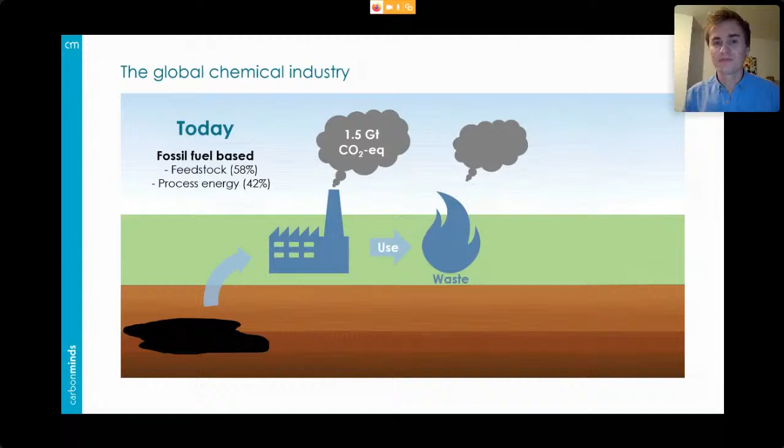What we see here, and what the industry is about today, is basically a flow from fossil resources in the ground, through production, through use, through disposal, right into the atmosphere. There's an almost linear flow of carbon atoms from the ground into the atmosphere, and this is a huge problem we're facing. This is what causes the climate problem.

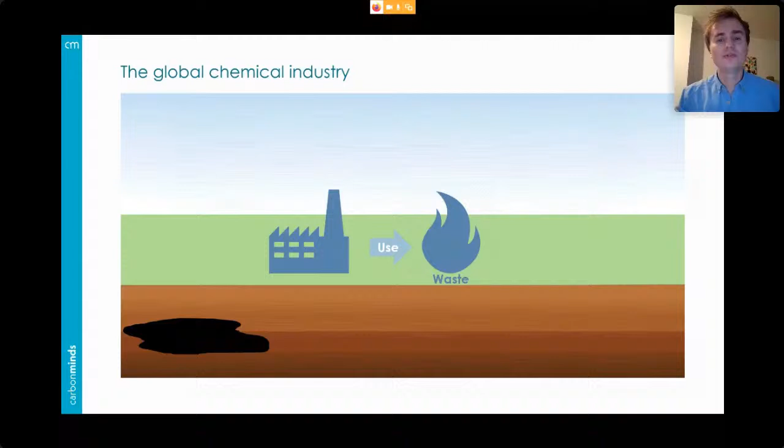So let's think about how we can change this situation. The idea is we need to avoid this flow of fossil resources from the ground, and we can do this by creating more circular carbon flows. One option here is carbon capture and utilization, or CCU.

In carbon capture and utilization, we capture CO2 from emission sources. This could be a power plant, a waste incineration plant, or even directly from air. We use the CO2 as a carbon feedstock for the chemicals we are producing, basically recycling it and putting it back into the production chain.

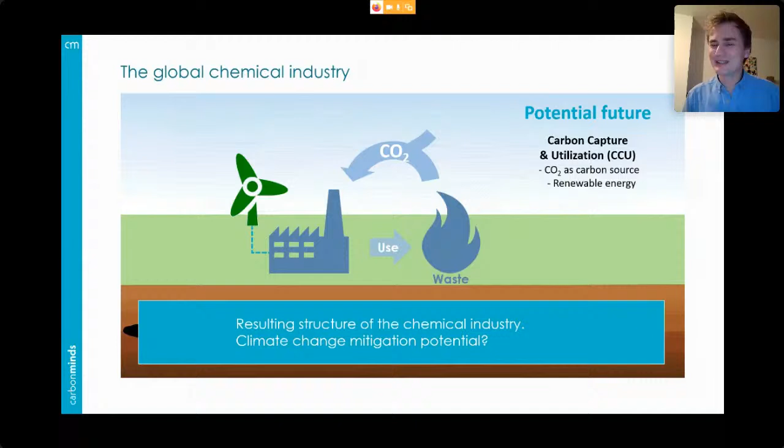We can do this using renewable energy. CO2 is very low in energy, so to build products out of it we need energy, which could come from another high energy reactant, often hydrogen, produced using renewable energy. So the question is, what is the climate change mitigation potential of this CCU concept? To understand this, we need to address another question first: how would the chemical industry look if it were entirely based on carbon capture and utilization?

So if we want to understand changes in the chemical industry, we can't look into different chemicals or different plants one by one. We need to capture this complexity of the industry. We need a detailed model of the chemical industry to understand potential changes. In this work, we built such a detailed model of this part of the chemical industry, for the production of so-called large volume chemicals, the biggest chemicals in the chemical industry.

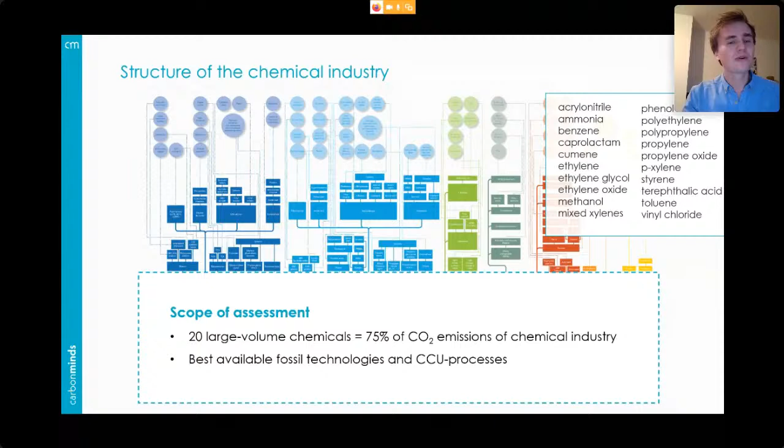We do this in this study by looking into the best available fossil-based technologies and comparing them to alternative options based on carbon capture and utilization. So how can we do that? Well, when we started to build this model, the first thing was we had to understand how these supply chains worked. So we looked into the supply chain.

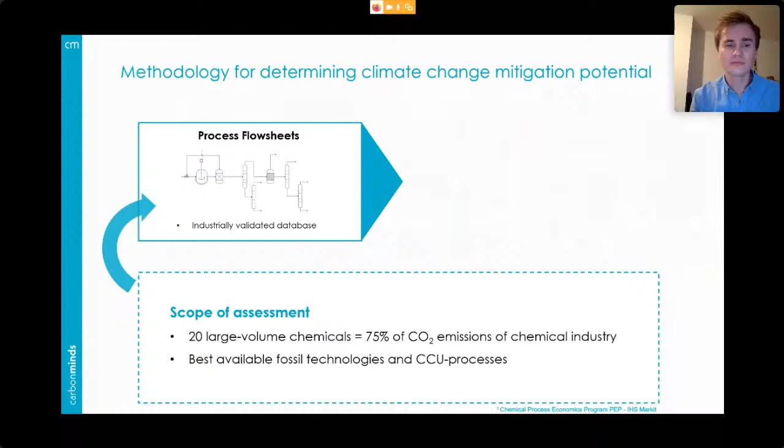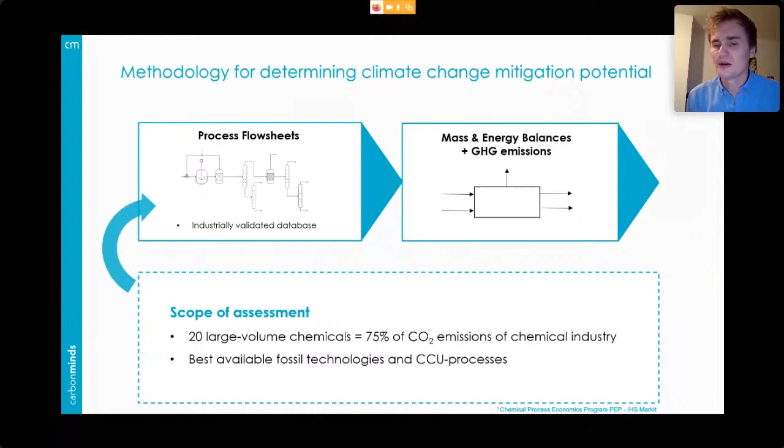For every single production step, we developed very detailed process flow sheets, like the one that you see on this slide, based on an industrially validated database. We used these flow sheets in order to extract mass balances, energy balances, and the direct greenhouse gas emissions of each process. Based on this information, we could build what is called a bottom-up model, a detailed model of this part of the chemical industry, consisting of more than 160 processes.

This model now allows us to track the flows of energy and material throughout the entire production chain of the chemical industry, from the resources to the products that we're looking at. So it's basically a digital representation of how chemicals are produced today.

And once we have this type of model, we can now, let's say, play with it. We did it by transforming it into an optimization model, which can minimize the greenhouse gas emissions of the production of these 20 chemicals for the final demand in 2030. The constraint here is that we will produce enough chemicals to satisfy the expected demand for 2030.

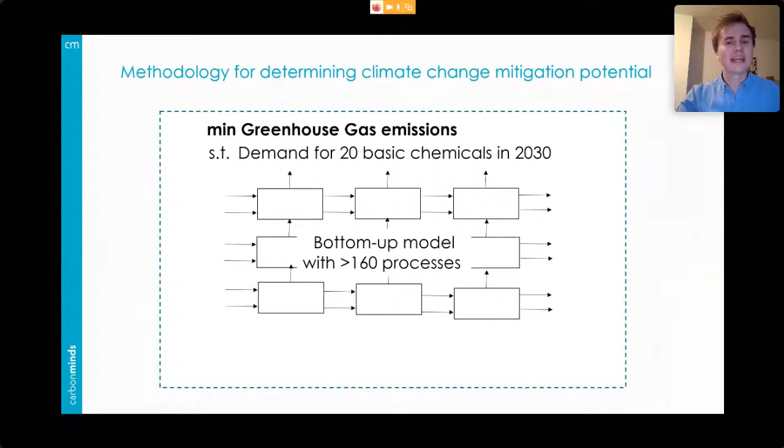Based on this model, we now compare 3 different scenarios. The first scenario is our baseline, what we call the business as usual scenario, or the conventional scenario, where chemicals are produced like they are produced right now. So let me show you how this works.

First of all, we input the final demand of all the chemicals into the model. These are just groups, types of chemicals—those are the 20 chemicals that you see here. Then we allow the model to use only the feedstocks that are used in the industry today, and then we can run this optimization model.

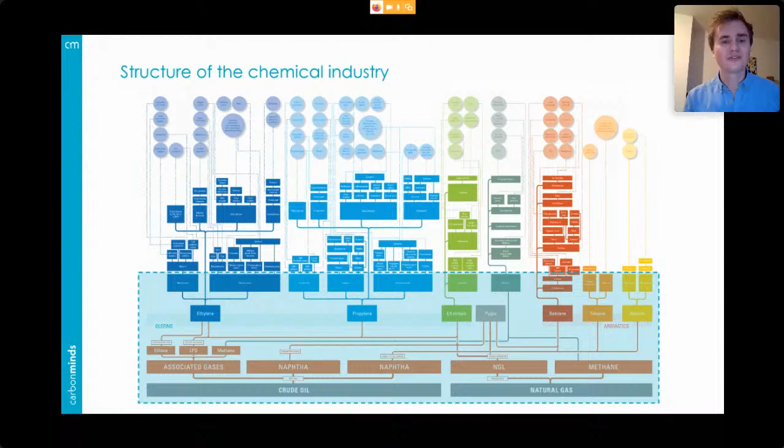We also calculated the emissions, which is in line with other emission expectations for 2030. So this was basically the validation of our model. It seems to work.

And now that the model works, we can go a step further and allow the optimization model to choose not only fossil resources, but also CO2 as a carbon feedstock, the captured CO2 from CO2 utilization, and we allow the model to use hydrogen from water electrolysis, hydrogen generated based on electricity.

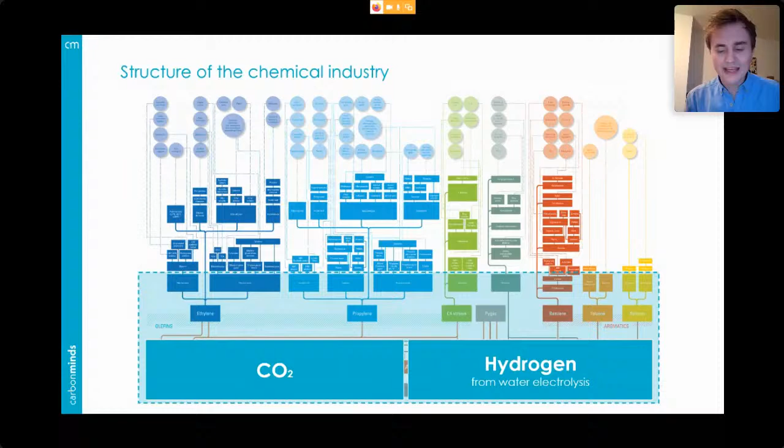We do exactly the same. We built two scenarios. A first scenario, which we call the high TRL scenario. TRL stands for technology readiness level, and high TRLs stand for technologies which are developed already very far, which are very close to the market or already in the market.

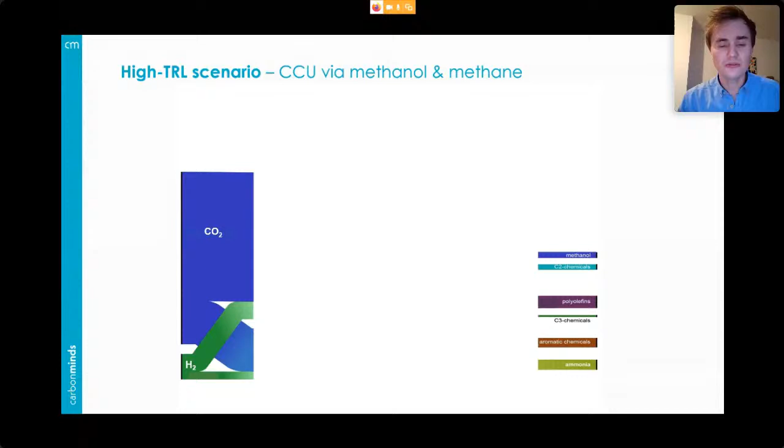We input the same final demand as in the previous slide, but now we allow the model to use CO2 and hydrogen as a carbon feedstock. We implement these high TRL CCU technologies, which is the production of methanol, a huge platform chemical, from CO2 and hydrogen, and methane.

Then we run the model again and get an entirely new superstructure for the chemical industry. What you see here is how the chemical industry would look like if it were entirely based on CO2 and hydrogen. Here, CO2 and hydrogen are transformed into methanol and methane. We use so-called methanol-to-olefin and methanol-to-aromatics processes to end up with ethylene and propylene, which are again the basis for the other chemicals.

There are two things that are very interesting in this slide. The first one is, as you might have seen, I've changed the scaling of the slide. This is because we have a very large co-production of water, so otherwise it just wouldn't have fit on the screen. The production of methanol and methane, and also the methanol-to-olefin processes, co-produce a lot of water. We can recycle this for hydrogen production, but this means our plants must become much bigger, which will increase investment costs.

But there's also good news in this: the part of the chemical industry that you see back here is the same structure that you saw on the previous slide. It's the same plants, how we start with ethylene, propylene, and aromatics and end up with the final products. So here, not much investment would be needed. This is one scenario for how CCU could be implemented.

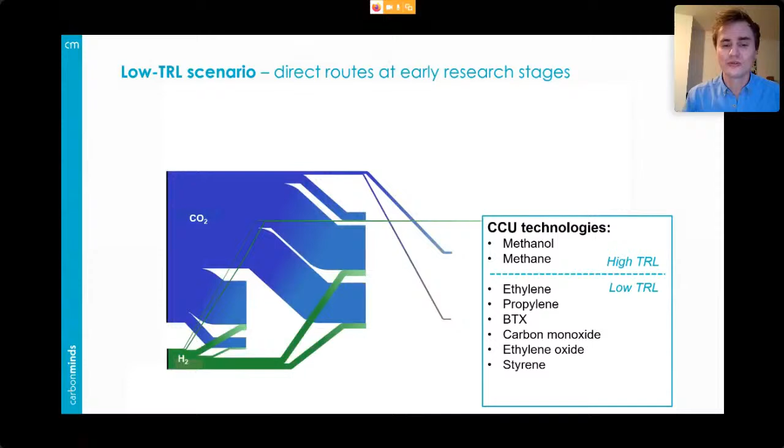We do the same: we start with CO2 and hydrogen. We can run the model and again end up with a completely new structure for the chemical industry. And here the good news is a little less water is co-produced, which is an indicator of higher efficiency.

But at the same time, this part on the right side is a completely new superstructure, which already hints that there would be quite a lot of new investment involved in achieving this scenario. But again, this is a structure for how the chemical industry, or a renewable chemical industry based on CO2 and hydrogen, could look like. And this is basically also the answer to the first question: what would the structure of the chemical industry look like?

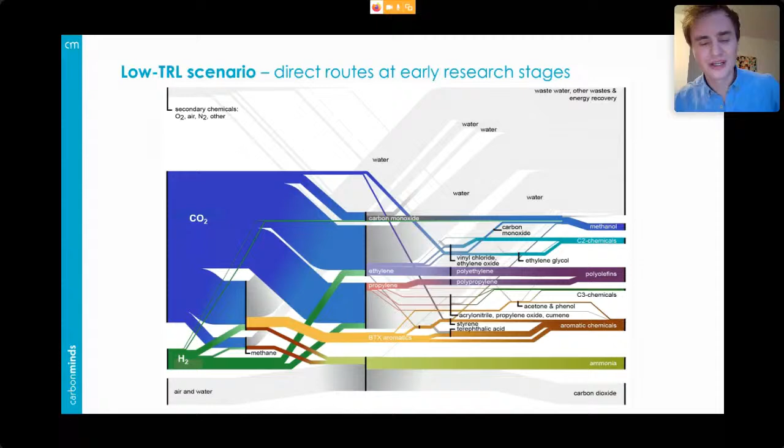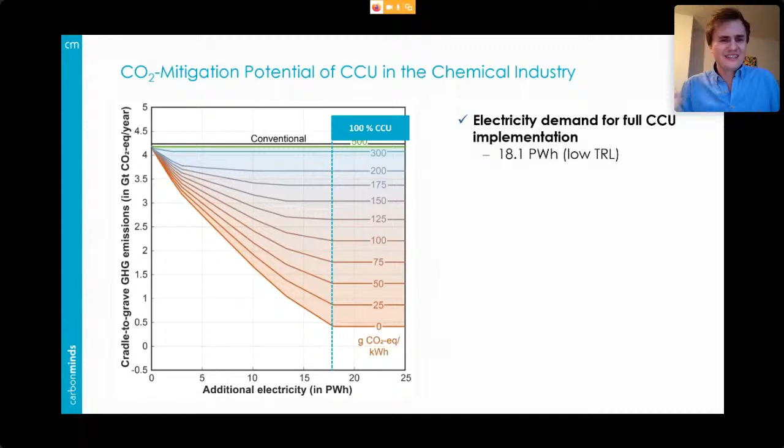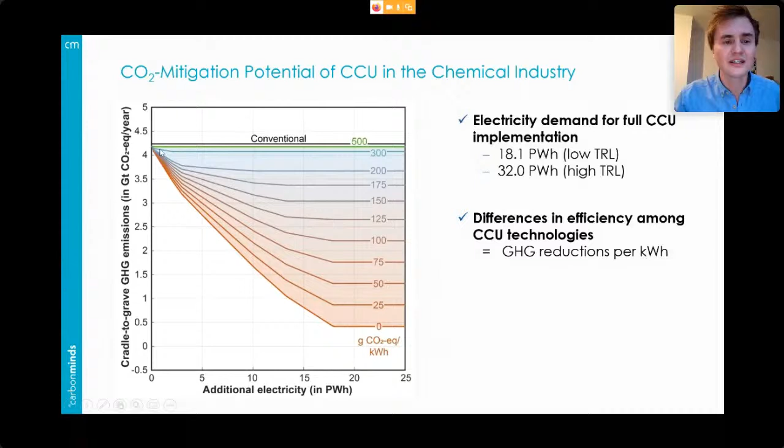And it's even more for the high TRL scenarios. So these new technologies at the low development stage, they are quite promising. But there's also, again, good news in there. There are differences in efficiency in reducing the climate impact, or in using renewable energy to reduce the climate impact. You can see this because the slope of this diagram in the beginning is a bit steeper compared to later. So this is a higher efficiency.

So if we can't deliver enough renewable energy to the chemical industry right away, for example in 2030, we can at least use it for the most efficient technologies, the ones that use the renewable electricity most efficiently to reduce climate impact. But still, only if we go for an implementation of 10%, 20%, 30%, this will still be large amounts of renewable energy. So as a society, we need to think about it.

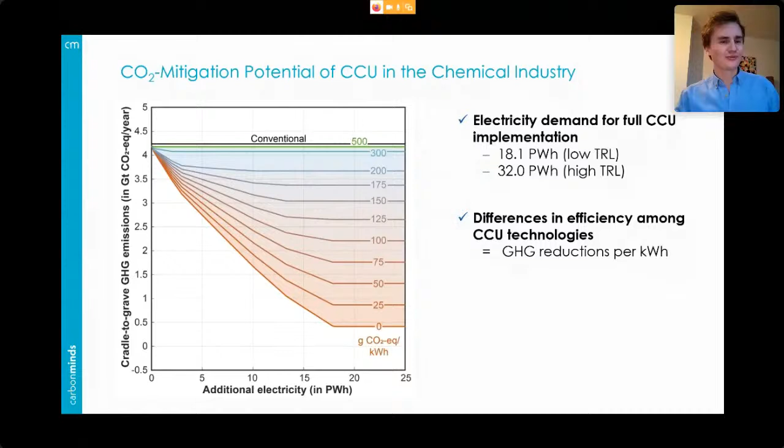Do we want to give our precious and limited renewable energy to the chemical industry, or are there better uses for renewable energy? To answer this question, I added these lines, which indicate the emission reductions we could achieve by not giving renewable electricity to the chemical industry, but putting it into other sectors, for example heat pumps to substitute natural gas boilers. This would give a much higher emission reduction per kilowatt hour used, down to 5 petawatt hours compared to 18.1.

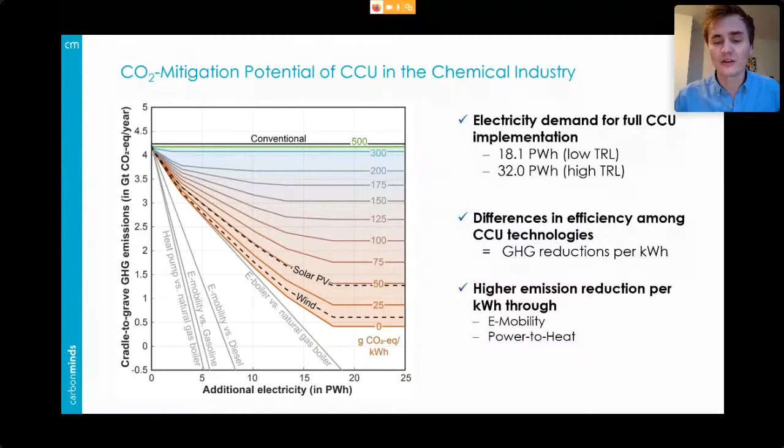We also have higher efficiency for e-mobility, electric cars substituting gasoline or diesel cars, and even for simple electric boilers, like the water boiler in your kitchen but on an industrial scale, substituting natural gas boilers. So we can see that those large-scale energy users reduce more emissions per kilowatt hour used.

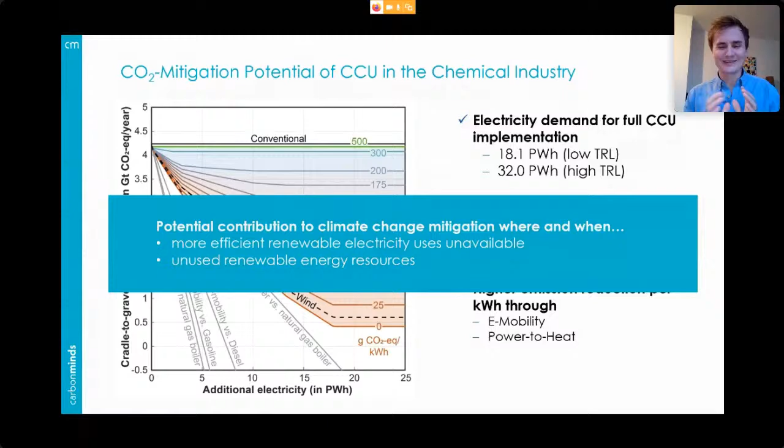So from a societal point of view, those should be prioritized as long as no other solutions are found for them. To summarize: there's a large contribution for climate change mitigation possible from CCU, but only where or when more efficient renewable energy uses are unavailable, so we don't steal renewable energy from more efficient options, but use unused renewable energy resources.

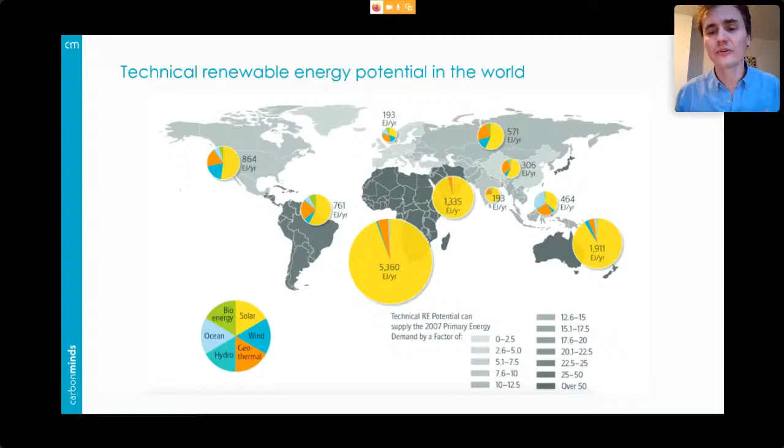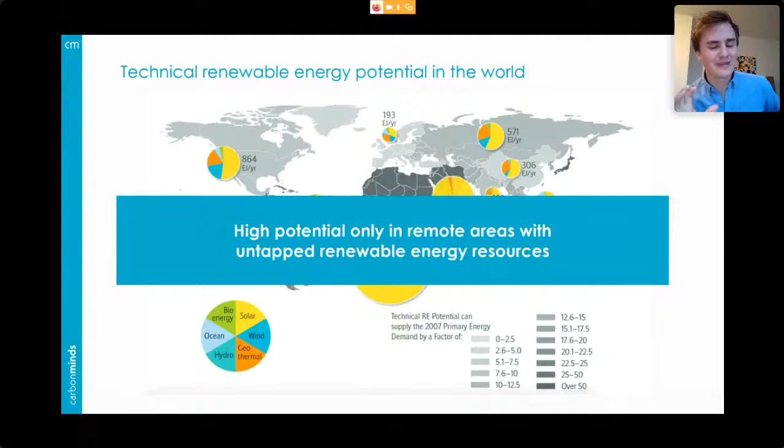So if we could exploit these renewable energies, for example by producing methanol there which we could bring to industrial areas for further processing, we could enable international trade of renewable energy, and by this means make the chemical industry much more efficient. So there's high potential in remote areas with currently untapped renewable energy resources. This is also one of the main messages I'd like to give in this presentation.

So let me conclude this presentation. What I would like you to remember from this talk: first of all, carbon capture and utilization has a very large climate impact reduction potential in the chemical industry - 3.5 gigaton CO2 equivalent by 2030.

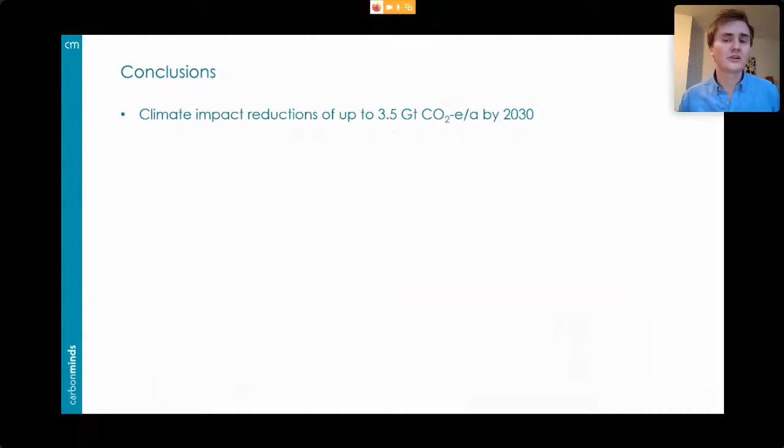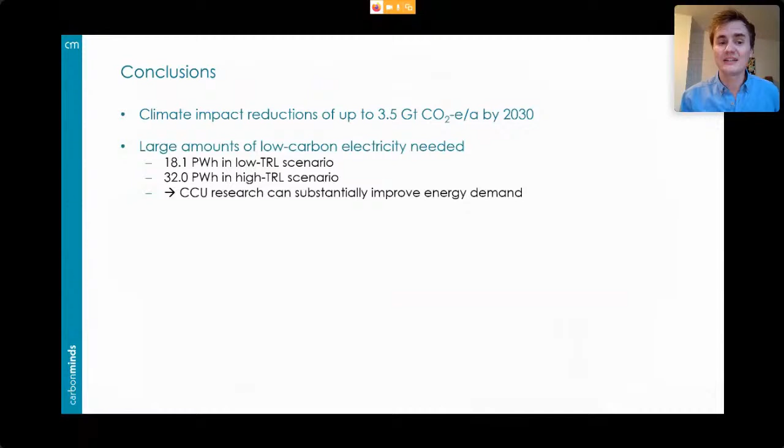But to exploit this potential, we need very large amounts of low carbon electricity. It's a bit higher for currently demonstrated technologies - we expect to bring it down quite a lot with new developments. So CCU research is very likely to improve the energy demand substantially, but it will stay very high. We've shown that carbon capture and utilization uses renewable electricity less efficiently for CO2 mitigation compared to e-mobility and power-to-heat applications.

And this also goes for carbon capture and storage, which we'll look at later in the presentation, if I'm right. So as long as we need the renewable energy for a better, more efficient application, we should do this. But still, there's a huge potential once we have decarbonized these other sectors, because we will still need material for our chemical industry. And there's a huge potential in areas where we have a lot of renewable energy - untapped renewable energy resources.

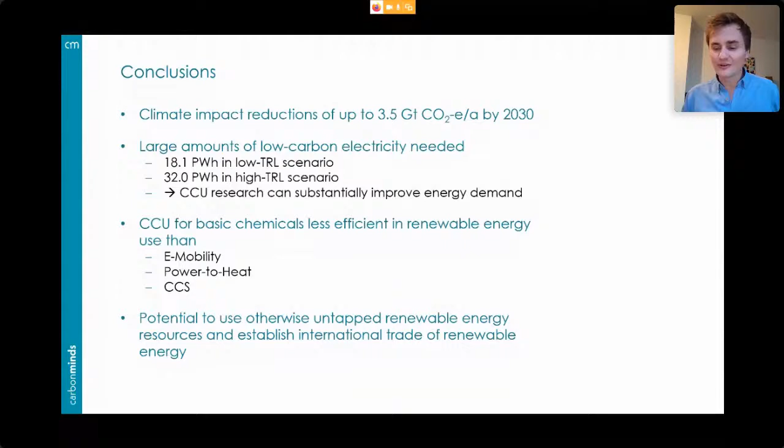And this is also my last conclusion from the slide. So thank you very much for your attention, and I'm looking forward to your questions in the panel discussion later.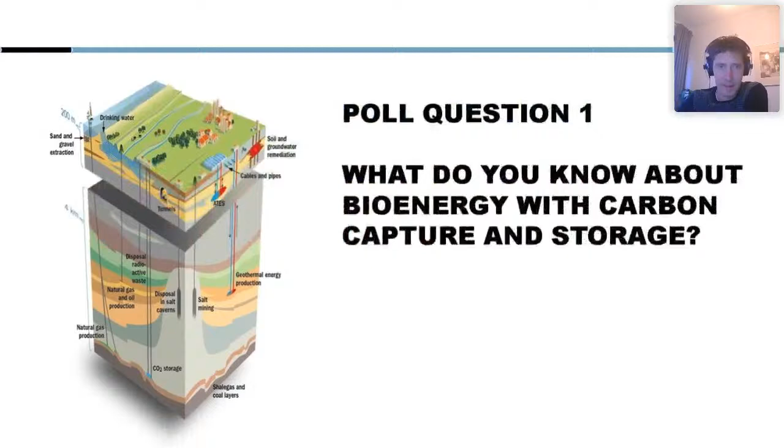So I have four sections in my presentation. I think it's very important to consider the why - why do we need bio-CCS, bioenergy combined with carbon capture and storage. How does this value chain look like? Are there already being done in the world? If we want to introduce this into the new energy system of the future, how can we do this and what's needed? So first, the first step.

So why do we actually need it? What you see in front of you is basically a very large set of future scenarios made by the IPCC, the Intergovernmental Panel on Climate Change. What you see here is a group of scenarios that bring us to a future that limits global warming below 1.5 degrees at the end of the century. There are also scenarios called P1, P2, P3, and P4 - illustrative pathways that help us think how this future could look like.

That brings us to 1.5 degrees max in 2100. You see in almost all scenarios, the line goes below zero, meaning we need negative emissions at some way, somehow. These scenarios give the opportunity to use biomass with carbon capture and storage. So basically you capture CO2 from the air as the biomass is growing, you capture the CO2 from using this biomass in a pathway, I'm going to explain that later, and you store it in the underground. So basically you remove CO2 from the atmosphere and store it in the underground.

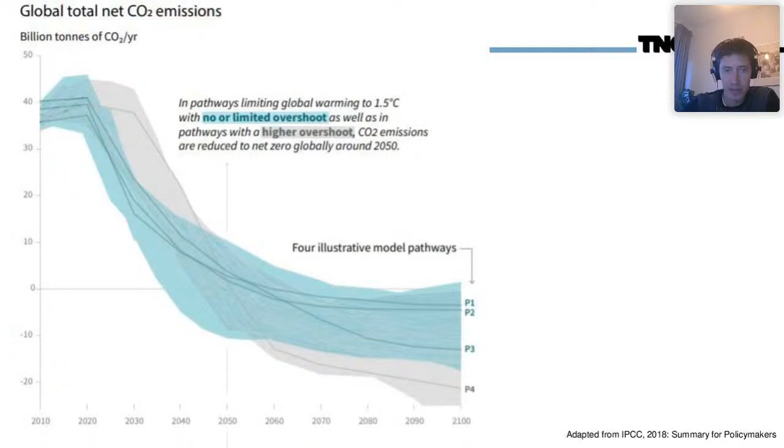You see here that the potential needed in these future scenarios is actually huge. In 3 out of these 4 pathways, we rely on a technology called BECCS, bioenergy with carbon capture and storage. In the largest scenarios, we actually need 16 gigatons - remember the quotes by the previous speaker, the gigatons per year. We need 16 gigatons per year and store it in the underground. That means you have to build an infrastructure and economics and market for an industry that is as big as the current oil and gas industry, but just for CO2 transport, storage, and using it.

So you need to build a whole new infrastructure that is not out there yet, and we need to build it as large as the oil and gas industry is now, just based on CO2, to get these numbers.

So why do we need it? Because we need negative emissions, but it's going to be a very big challenge.

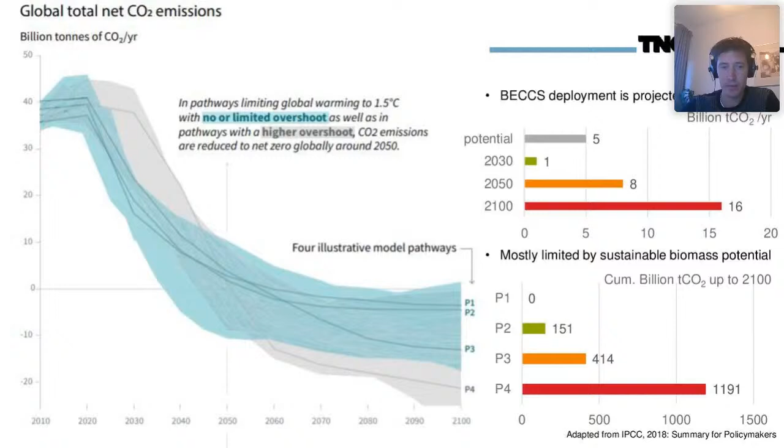So how does this BECCS value chain look like? It always starts with biomass feedstock. I've noted here a tree, but it can also be a lot of other biomass feedstock like waste from municipalities, but it can also be fast growing crops.

It can be sludge waste, everything with biomass feedstock in it. Then you have to pre-treat it. In large cases, it has to be dried or otherwise treated so that you can transport it to the area where you need it. Then in a conversion plant, you can use it to produce heat, electricity, or chemical feedstocks, maybe in steel production, cement production, and other parts where you can use this biomass.

And the CO2 that is being released by this use of the biomass is not released into the atmosphere, but you capture it and transport it via pipelines and store it underground. For instance, in empty gas fields, empty oil fields, or aquifers - water-bearing layers in the subsurface where you can inject the CO2 and it stays there for the next millennia.

So this is the basic concept. Here you can see again, you capture basically the CO2. The capturing is being done by nature, by growing biomass. And then the chemical engineers make it work in the industry or industrial facilities to actually remove CO2 from a stream, transport it, and store it underground.

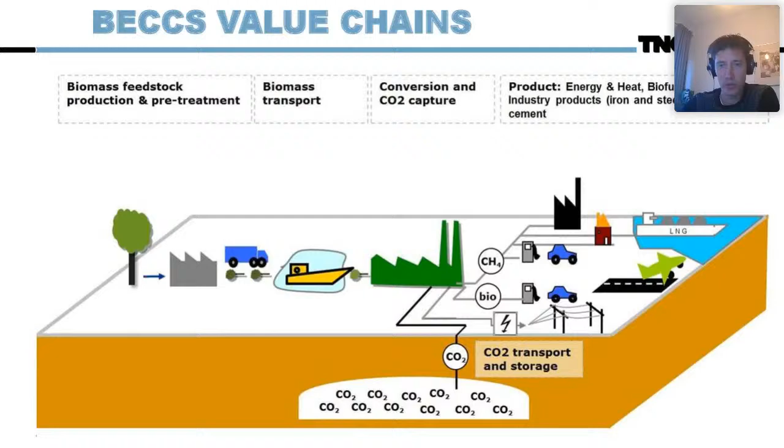So I think as a chemical engineer, you have a very important task here, because you have to make sure these industrial systems work where you capture the CO2. There are several flavors to do this. How can you capture CO2? You have post-combustion capture - you can capture CO2 out of the flue gases from a process.

So let's say combustion of biomass. For that you need air and a fuel, and the outcome is a CO2 concentration in that flue gas, and there you capture the CO2 using chemical absorption. This is already a proven process since the last century - it was invented in the 1930s, so it's well applied already, but not so much applied yet for carbon capture and storage.

Then we have pre-combustion, which basically always evolves around a high partial pressure of CO2 in a flue gas or process stream. Here it follows from gasification of biomass - you can gasify biomass using air or steam, then you have a water gas shift reaction or reform reaction. From that reaction, you can capture CO2 most of the time using pressure swing adsorption, membranes, or chemical absorption - there are different means to capture that.

The main benefit of this line is that you capture CO2 at a higher partial pressure, so the cost of pre-combustion capture is mostly lower than the cost of post-combustion capture.

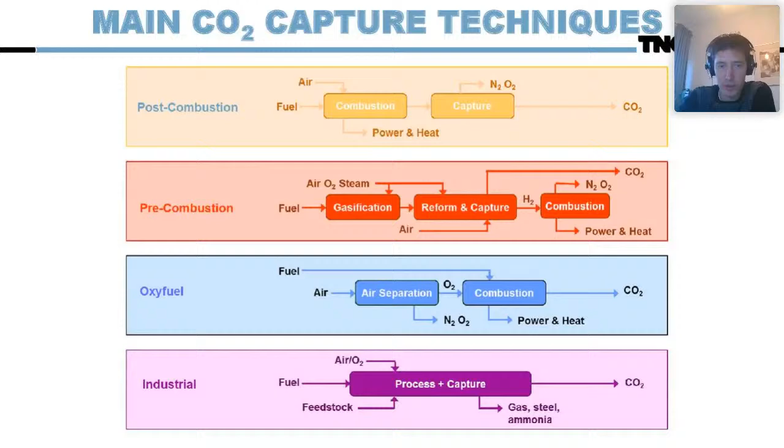So how do these BECCS technologies look like? We have basically four groups here. On the left-hand side of the slide, you see the biomass source that we can use, and on the right-hand side, we see the end product that it will yield for us.

So first we start with the fermentation route. You can use manure - that's dung - or biodegradable waste from municipalities or other sources, and use it in fermentation, or digestion, to produce biomethane. From that process you can capture the CO2, remove it from the stream, and store it underground. In that sense, you get not just a carbon-free biomethane, but actually a carbon-negative biomethane - it saves you CO2 by using this product.

Same thing for sugar, starch, and crops. You can use these crops to ferment, and then you get ethanol. From this ethanol process, you can capture CO2 and remove the water, and then you have an ethanol stream. This is widely used in the world, mostly in Brazil, where they produce huge amounts of ethanol through this route from sugarcane.

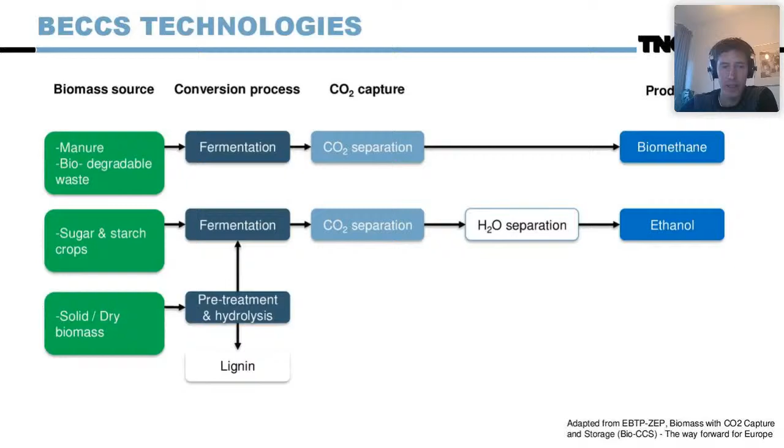And there's also a new route, where you can use solid and dry biomass after pre-treatment to make ethanol as well. If you look at the world, this is the low-hanging fruit for bio-CCS - it's a low-cost CO2 capture system to basically produce ethanol and remove CO2 from the process.

Then we have the second route. I already explained that you can gasify material. You can also gasify biomass with oxygen and steam. From that product, basically a syngas, you can use a water gas shift reaction and separate the CO2 from it using pre-combustion capture. From then you can use that as a building block, as Dr. Arne explained, for the chemical industry. You have hydrogen, but you can also have a methanation step to produce synthetic natural gas. You can apply Fischer-Tropsch synthesis to produce diesel, gasoline, kerosene. And you can also have methanol synthesis, which is a good building block for the chemical industry, but also for gasoline and dimethyl ether. So this is the gasification route.

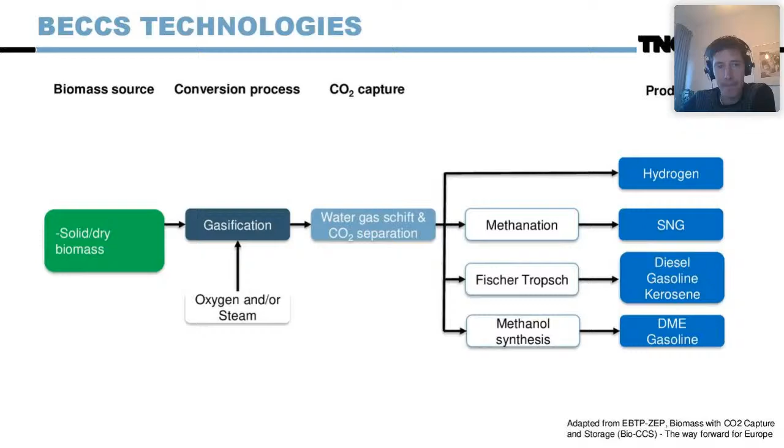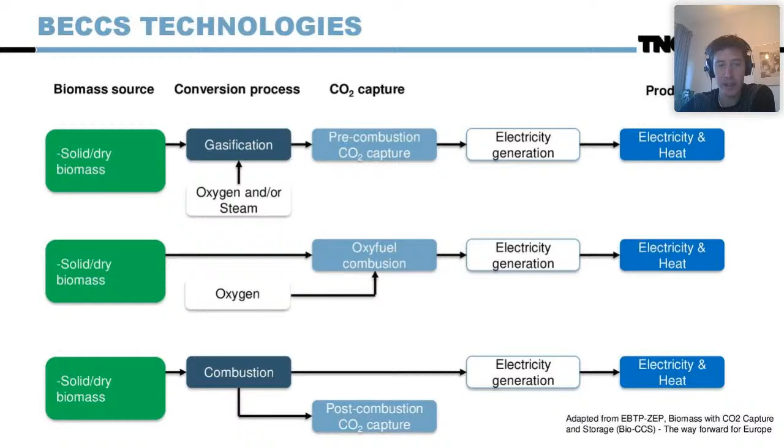Then we have the power production family. With gasification, you can fire an electricity plant, basically a natural gas combined cycle plant that produces electricity from the hydrogen flow you produce from gasification, giving you electricity and heat that you can use. You can also have oxy-fuel combustion, where you combust biomass with very high values of oxygen, nearly pure oxygen. You produce electricity and remove the CO2 and store it underground. Then we also have the route to combust biomass in existing power plants, which could be converted coal-fired power plants or co-firing of power plants, and then you capture the CO2 and have heat and electricity production. From these routes, you can produce carbon negative electricity, electricity that has a carbon emission below zero.

Then we have the final family, the industrial processes that are being fed by biomass. From that we could produce cement, for instance, and apply it in refineries, ammonia production, but also steel and pulp and paper production. These routes are also being explored right now, especially pulp and paper, steel, and cement production, in industrial programs around the world. This will yield us carbon negative products, so carbon negative steel or cement in the end.

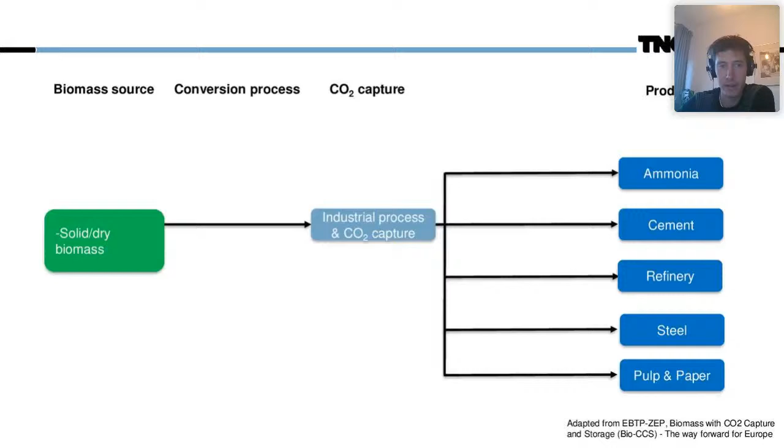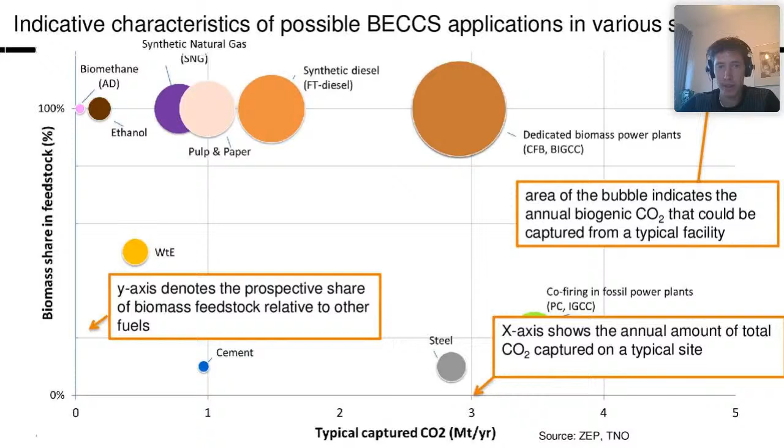The bubble size also shows how much negative CO2 emissions you can achieve. Looking at certain sectors, you can see the very big ones: power plants, but also synthetic diesel and Fischer-Tropsch production, which have potentials of about 2-3 megatons per year of negative emissions. You also have the smaller factories of ethanol production and biomethane production—they have potential, but they're much smaller in terms of annual CO2 emissions avoided. Here we have a waste-to-energy plant making electricity and heat out of waste, which can also give us negative emissions.

Down below, we have more of the industry applications, cement production and steel, and it's lower not because these industrial complexes are smaller, but because it's more difficult to fire them with very high shares of biomass feedstock. That makes these plants attractive for carbon capture and storage, but for biomass combined with carbon capture storage, it's a bit less applicable. So you can see somewhat lower CO2 emissions avoided, in terms of negative emissions, than for the other technologies.

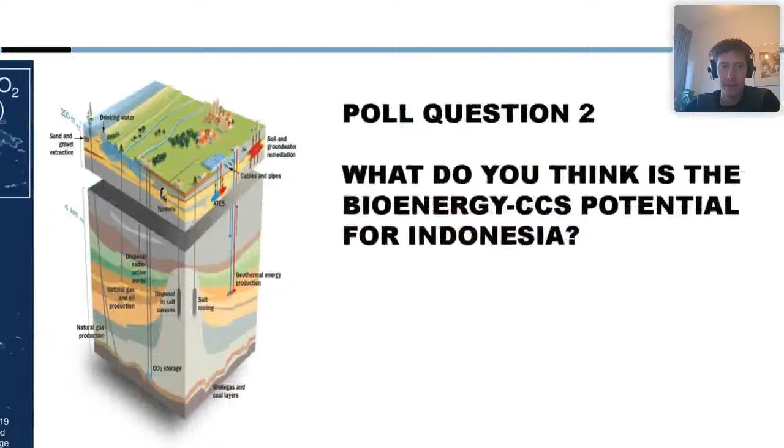So a poll question that might be nice to answer for the discussion round: what do you think is the bioenergy-CCS potential for Indonesia?

Yeah, so that's going well. Maybe we can come back to this in the discussion part. Then I can finish the last part of my presentation.

Can we go back to the presentation, maybe? Yep.

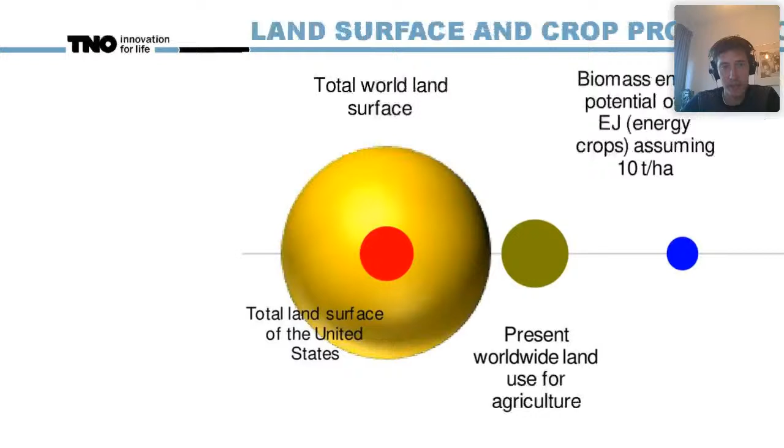I have a small example of why this is very important. In this slide, you can see the total world land surface. Just for comparison, this red dot is the land surface of the United States. Then I've made a small bubble showing the present worldwide land being used for agriculture, so this is the part of the available land that we use for agriculture.

So this blue dot is what we would use. This is the bioenergy potential of 65 exajoules, and that's what we will need if you think about the scenarios of about 10 gigatons of CO2 back towards the end of the century.

So you can already see that you have to devote a very big part of your available land for agriculture to producing energy crops. This has to be sustainable. It should not be an argument to clear out rainforest or valuable wildlife areas to produce energy from this system. We should be doing this on marginal land, of low value, that doesn't have high biodiversity value. So we need to find a solution there.

This is a big challenge—I think the biggest challenge for carbon capture and storage from biomass.

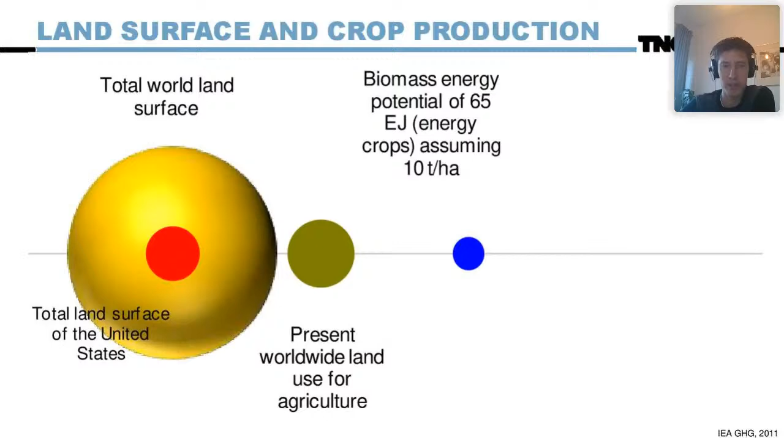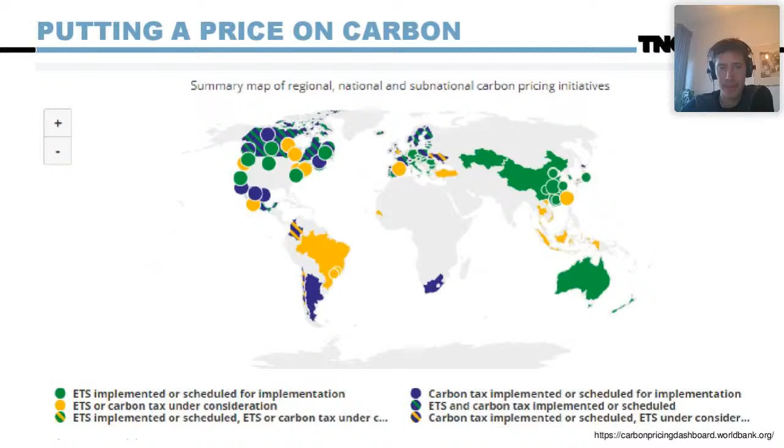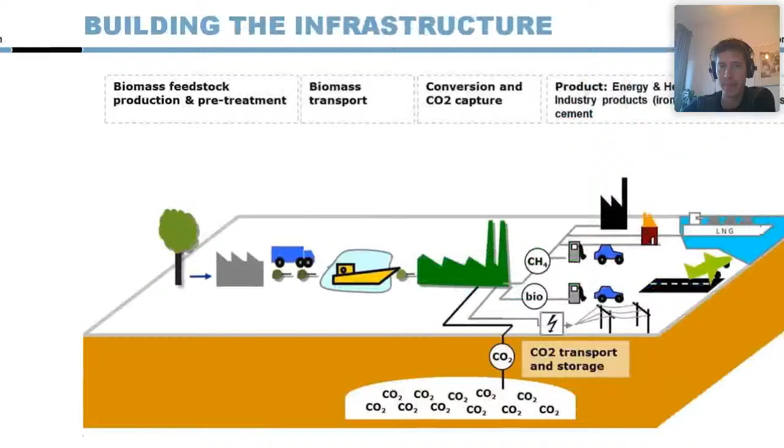And then, last but not least, as I explained at the beginning of my presentation, you have to build this whole infrastructure from biomass production towards biomass conversion, carbon capture and storage, and transporting and storing it in the ground. If you think about these big scenarios from the IPCC, you have to consider building infrastructures that are now the same scale as for oil and gas production and distribution worldwide.

So those are my key takeaways, and I'm looking forward to having a discussion on what's just been presented.

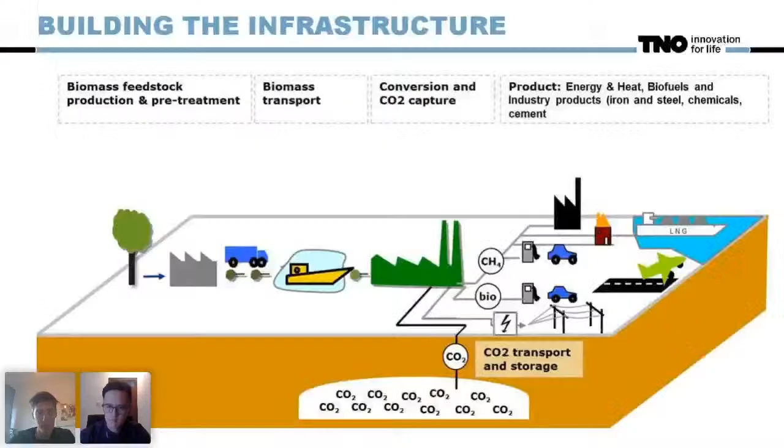Basically, you have to think of several things you carefully need to monitor when you're injecting CO2 in the subsurface. You have to be very sure that the CO2 you're injecting is staying there. So you have to have this layer above your reservoir where you're injecting it - it should be a good cap rock on it. That should be a bit of the earth that really captures the CO2 well, so that it stays there. That's a very important thing you need to check before you start injecting, and you can also monitor that partially during the injection.

A chemical process that is maybe interesting when you're injecting CO2: if the pressure downhole is pretty low, for instance when you have an empty gas field, and after production you are storing CO2 in it - if you inject high pressure CO2 into it, you get expansion in the bottom hole. You can expect that, and due to the Joule-Thomson effect, you get cooling in the reservoir, and that's something that could be a challenge. That's now an important part of research - how to prevent this and how to work with it when injecting CO2 in empty oil and gas reservoirs. So you have to check the reservoir, basically the layers above your reservoir, carefully before and during injection.

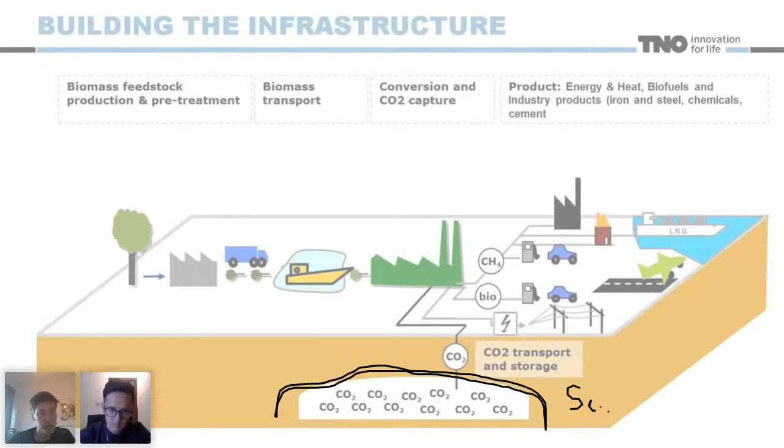You have to monitor the CO2 with, for instance, seismic surveys to see whether the CO2 is staying there. Then a very important part is you have to check whether your well, whether it's an existing oil and gas well or a new well, is built up with good materials so the CO2 cannot leak past your well to the surface again. So I think those are the most important aspects to think about with CO2 injection.

But this should always be looked at in perspective, because CO2 injection is already being done in the oil and gas industry for enhanced oil recovery, for instance in the US, but also other countries. It's been done for decades already, so there's a lot of experience with injecting CO2 in the subsurface, and also a lot of experience injecting CO2 for actually storing it. So yes, you have to very carefully check your subsurface and monitor what happens, but if you look at the project right now, there's ample experience that we could do that safely.

Okay, any comments from Dr. Katalhun, if you would like to add something?

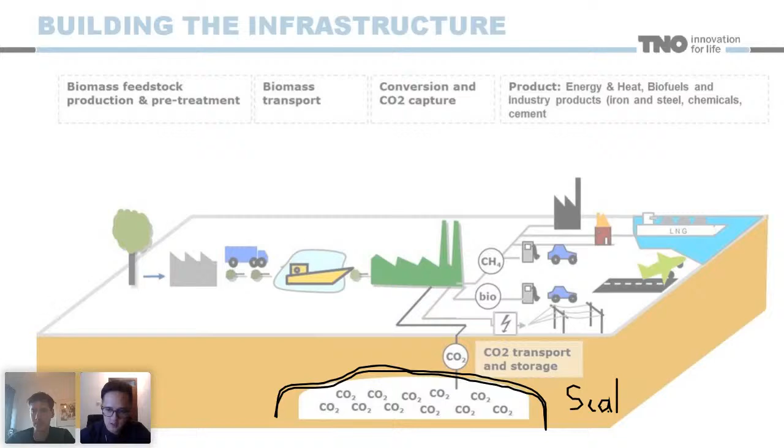Maybe another session if we need to invite an expert on CO2 storage about how they properly select and model the injection selection. Some key important features already mentioned by Dr. Cornif: it has to be able to maintain the CO2, keep it underground for, let's say, 100 or even 1,000 years. We don't want to inject the CO2 and have it keep leaking to the surface, above ground, causing communities close to this location to have complaints because it's unsafe for them and affecting their environment. So that's why it's a very important step in selecting the injection or storage site for the CO2 well.

Okay, I think we can go back to the Slido. Let me check the next question. So the next question would be: are there any drawbacks on CCS, CCUS and bio-CCS implementations, and what are the strategies to compensate for those drawbacks at the moment?

Maybe I can start for the CCU part. I think for CCU, a drawback of many of the ideas out there is the electricity demand. As I showed in this presentation, CCU at the moment requires a lot of low carbon electricity. So one very important stream of research is the question of how to bring down the amount of renewable electricity that we need. That's on one hand. But having said that, there are also CCU technologies which do not need renewable electricity, for example CO2-based polymers, because they react with another high energy reactant. So those technologies will not have the same drawback, but I think most CCU technologies do have this huge electricity demand.